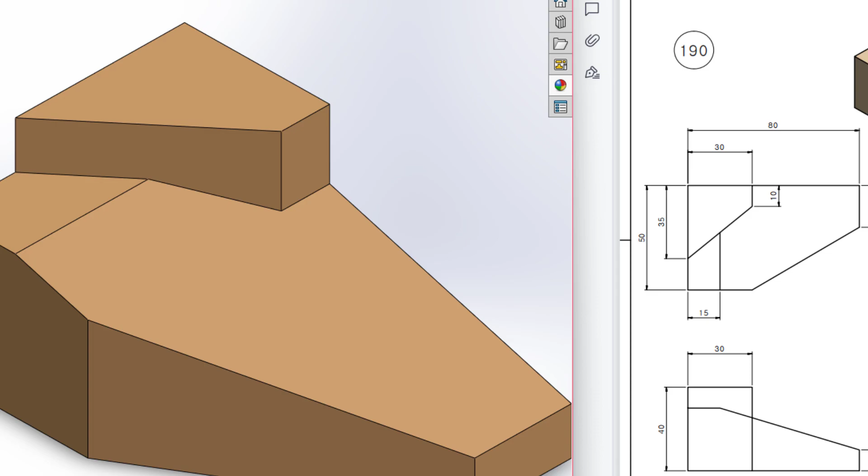Today we are going to solve this 3D problem. In this 3D problem, this is the isometric view, this is the top view, this is the front side view, and this is the right side view. So first of all, I will start drawing from the top plane. In the top plane, I will draw a rectangle, and this rectangle has a dimension of 50 by 80 unit. Then I will proceed to 40 unit.

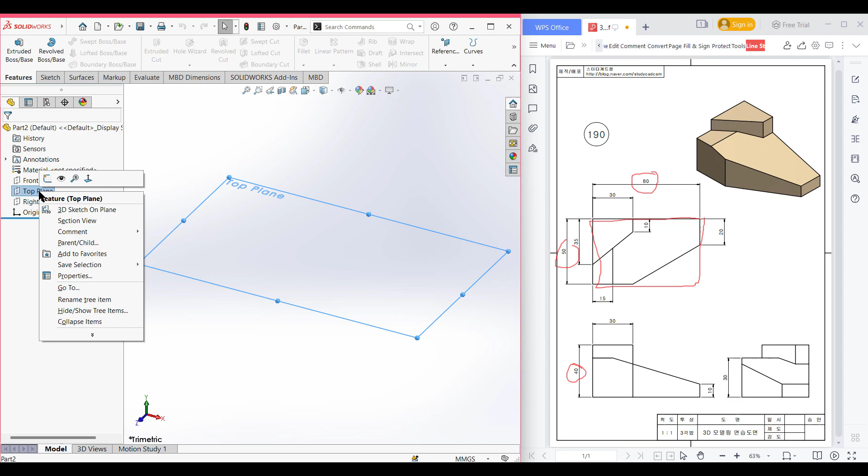Okay, let's go back to our sketch. Now select the top plane, now sketch, now normal to it. After that, select the center rectangle and draw a rectangle of 50 by 80 unit. Now isometric it for a better view. Now go to features, now extrude boss, now extrude boss it to 40 unit. Now press OK. After that, let's go back to our sketch again.

Okay, in our sketch we can see that we have an extrude cut portion like this one. So for drawing that extrude cut portion, first of all I will draw a horizontal line in the front face, and this horizontal line has a dimension of 15 unit. Then from that horizontal line I will draw an inclined line, then I will dimension it to 10 unit from this point. Then I will close this shape. After that I will extrude cut it to through all.

Okay, so let's go back to our sketch. Now select the front plane, now right click on it, now sketch, now normal to it. After that, select the line from here and draw a horizontal line of 15 unit. Then draw an incline line, and after drawing that incline line, dimension this incline line from this point to this line. The dimension is 10 unit. So dimension it to 10 unit.

And if we look back to our sketch, the total distance here is 40 unit. So this distance will be 40 minus 30 unit. So this distance will be 10 unit. Okay, so select the smart dimension tool from here and select this horizontal line and also this parallel horizontal line and dimension both lines to 10 unit.

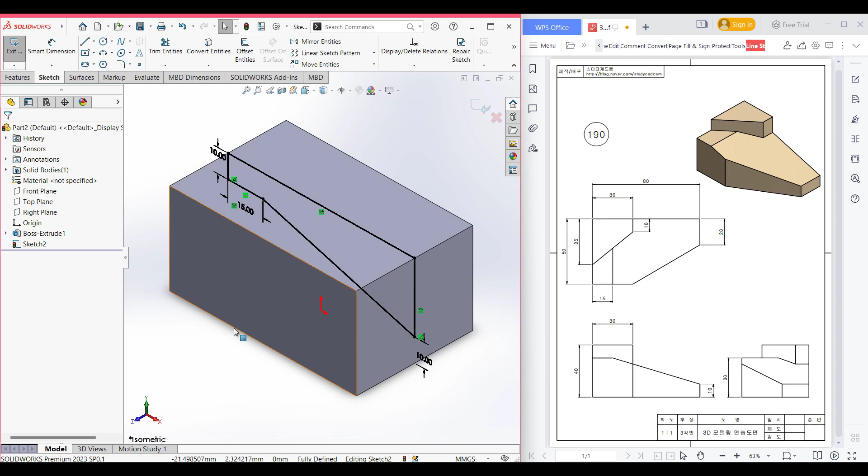Now select this full sketch. Now convert it. So a rectangle has been drawn. Now normal to it again. Now select the trim option. I'm selecting trim option and trim the line that we don't need. Okay, now press OK. Now isometric it for a better view. Now go to features. Now extrude cut. Now extrude cut it to through all both. So selecting the through all both from here. Now press OK. So let's go back to our sketch again.

In our sketch, in the top plane, we can see that we have a vertical line here, and this vertical line has a dimension of 10 unit. Then I will draw an incline line, and this incline line has a distance of 35 unit and 30 unit. Then I will extrude it from the top plane. I will extrude it to 40 unit.

Okay, let's go back to our sketch again. So I am selecting the top plane here. Now right click on it. Now sketch. Now normal to it. After that, select the line tool from here and draw a line of 10 unit. So drawing a line of 10 unit. Now draw an angled incline line, and now select the smart dimension from here and dimension from this point to this point, dimension it to 30 unit. Again select this point and this horizontal line and dimension it to 35 unit.

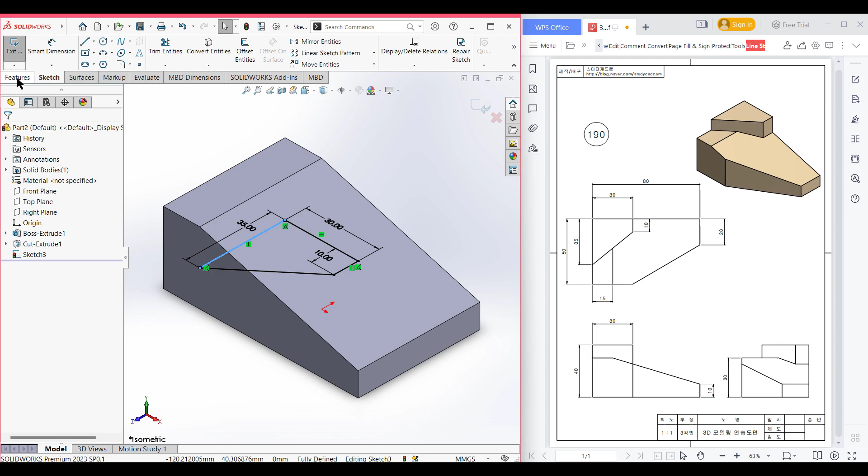Now isometric it for a better view. We can see we have drawn the shape, but we need to close the shape. So I am taking the sketch to normal mode again. Now select the line tool from here and join all the points. Okay, now it has been a closed shape. Now isometric it for a better view. Now go to features. Now extrude boss. Now extrude boss it to 40 unit. So the dimension is 40 unit. Now press OK. Now again let's go back to our sketch.

In our sketch we can see we have an inclined rectangular cut from the top plane, and for drawing that I will draw an incline line, and this incline line from this point to this point has a distance of 20 unit. And as we can see, this line is almost along with this line, so the distance of this line is 30 unit. So from this point to this point the distance is 30 unit. Okay, and then I will close the shape, then I will extrude cut to through all.

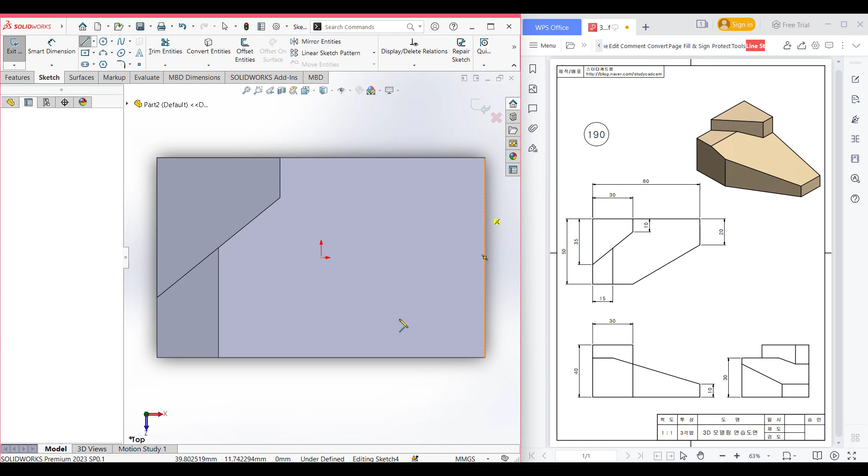So let's go back to our sketch and now select the top plane from here. Now sketch, now normal to it. After that select the line tool from here and draw an incline line here. And after drawing that incline line, select the smart dimension tool and select this point and this horizontal line and dimension them to 20 unit. Now I can select this point and this vertical line and dimension that to 30 unit. Now select the line tool again. Now close the shape. So I'm selecting this point and closing all the points.

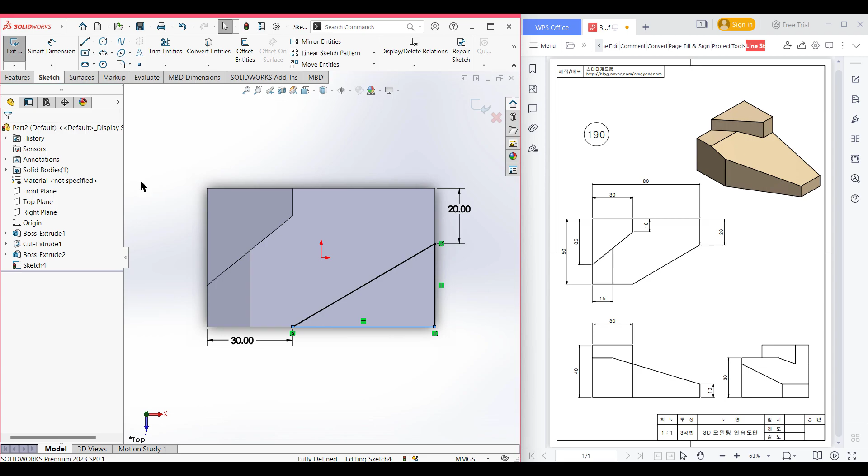Now press OK. Now isometric it for a better view. Now go to features. Now extrude cut. Now extrude cut it to blind, and the extrude cut will be in the upper portion. So in the upper portion, now press OK. So as we can see, we have done our 3D sketch.